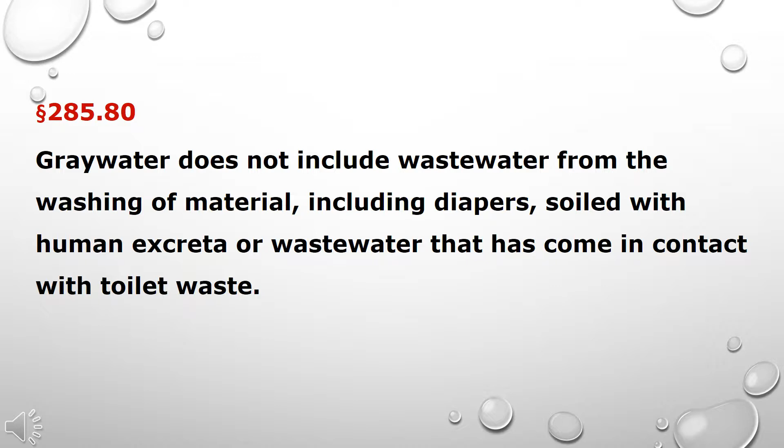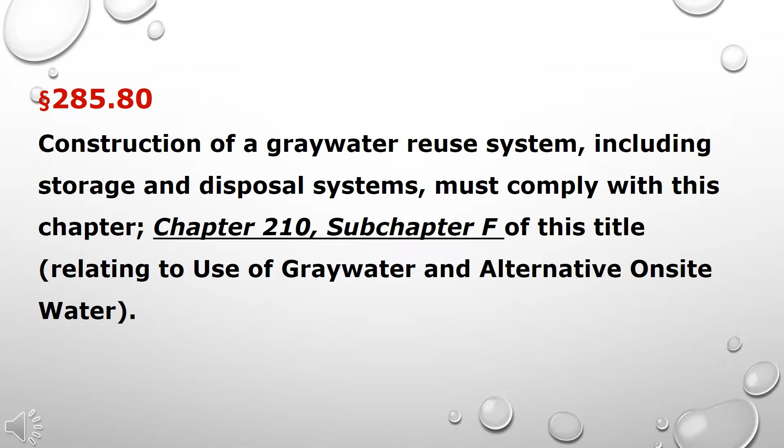So unless you've got a pier and beam house or something like that, you can get under and change the plumbing, you're really looking at new construction. So we're going to be looking at new things you're bringing to folks as we go along. Okay. Construction of a graywater reuse system, including the storage and disposal systems, must comply with this chapter, which is chapter 210, subchapter F. That's the big boy rules relating to gray water and alternative on-site water. And we'll talk about gray water and on-site water.

Gray water reuse must not create a nuisance. It must not damage the quality of the surface water or groundwater, meaning you can't go into ponds, the river, the lake, that type of thing when you're talking about surface waters. And you can't have it seeping into the ground. Let's say you've got your wellhead here, the pipe coming up, and all this water is gathering around and seeping down the casing and heading towards your groundwater. You can't do that. We're not going to be flowing it down the hole where we might have our casing.

So if gray water reuse creates a nuisance, threatens human health, or damages the quality of surface or groundwater, the permitting authority may take action under 285.71, and that relates to the authorization. That's where they throw the sheriff out there and shut you down. So they can basically say, we can stop you once you put it in. Well, that goes with anything we have; we make you fix a broken system as well. But in this case, there is authority to come back.

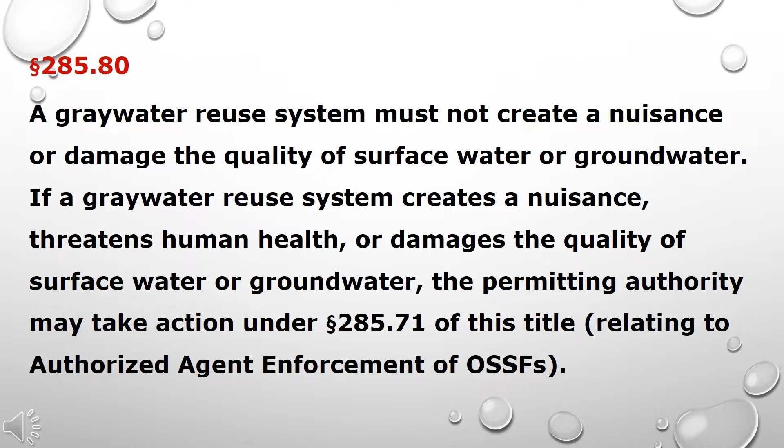Alternative water: we can combine our gray water, which is from our home, with the following: rainwater, air conditioner condensate, foundation drain water, storm water, swimming pool backwash and drain water, and reverse osmosis reject water. Those are all sources of other water that we're generally throwing out or putting into a system, and we can bring those in as part of our combined reuse system.

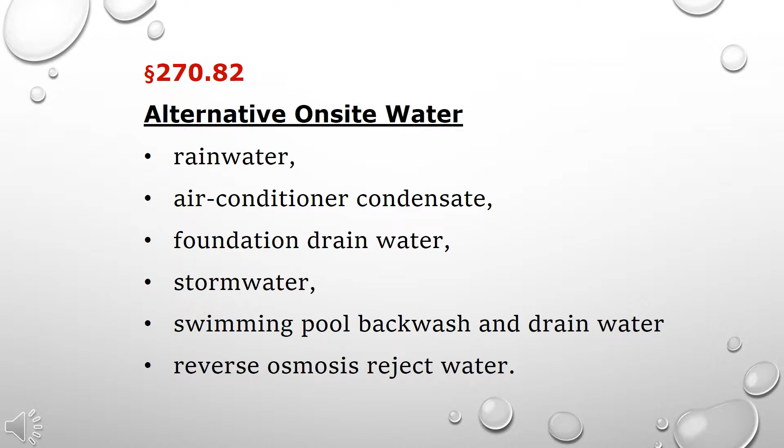All right. Under 285.80, no reduction in the size of the on-site facility, the OSSF, will be allowed when using gray water reuse systems unless the OSSF meets all the conditions and requirements of 285.81. Isn't that neat? We just turn the page and all of a sudden we can do it. But there's some things. I put this little warning up here: when you start going down that road of making things smaller because you think you're going to save somebody some money, unless there's a really good reason, I would approach with caution.

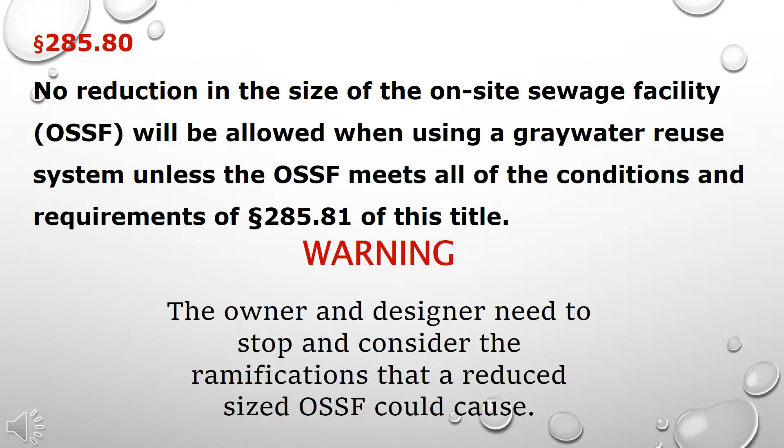The owner and the designer need to stop and consider the ramifications a reduced size OSSF could cause. In other words, are we going to have problems with this thing? You should be thinking: if I'm pulling the water that is our dilution factor, our showers, our wash water from washing machines, what's going to happen to the sewage strength? It's going to go up. We're going to talk about that, so keep that in mind. That's why I'm saying approach with caution.

Now this is a little comment I've got in here, so don't pay any attention to it. But it would appear that these two chapters, 285H and 210, were created to meet the apparent problems of some voting constituents. We have politics involved with this, and there's been problems with water. There's no doubt the severe droughts of the past years have left more questions than answers, and it was time for a political, not necessarily a scientific, solution. That's my own personal feeling, not TOWA or anybody else. But you've got to take a look at these things.

We've had problems, and we got some relief. Somebody said, hey, we've got all this water we're throwing away, how can we use it over here? Sure, go right ahead—other states are doing it. Why can't Texas do it? And we're not, but now they're doing it, basically pretty much hands off, letting you do what you want to do. Now, that does come with some concerns. So let's take a look at it.

So we've got waters from different mothers: gray water and alternative on-site water. That's the two different waters, coming from two different directions—two kinds of water that in the past would never have met. We would not be mixing water that typically came into our septic system with water that came off our roof or off a condensate system, unless it was plumbed wrong. We would never typically put them together. So now we can do that—we can pull them together. We're going to put them in a special place, but we can pull them together. The two kinds of water can now be mixed.

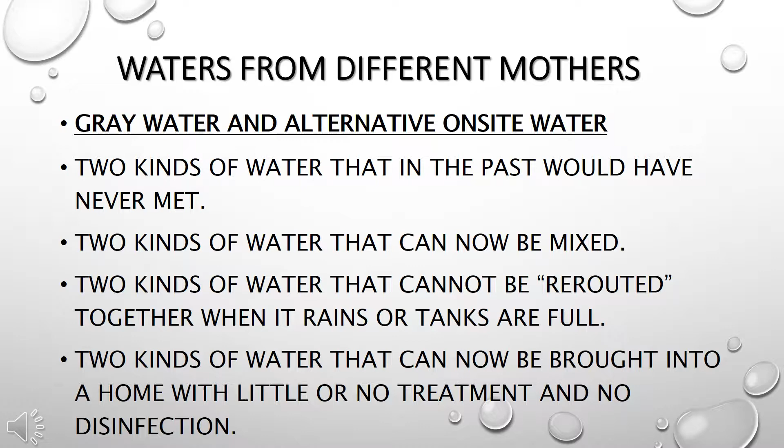Two sizes and two ways. Under the 285-80 and the 270 and the 210—I keep saying 270, but it's wrong, it's still the 210—graywater, and graywater as part of a combined system, can be connected to and returned to the OSSF if not being used. Now, the part that's going back, this is for a full-size system. So if we've got a big ATU out there sized up for our 3-bedroom home, and we took some of that water away, we can now bring that water back to it.

We can't bring the rainwater or drainage water back, but we can bring back the gray water because we're not using it. Maybe it's raining and the tanks are full, we have a certain level we can only keep our tanks at. So this is for the OSSF systems that have not been reduced from the reduction process with respect to the gray water removed. Any of that water that's not part of the gray water has to be redirected, piping that throws it back on the yard or down the gutter and away.

That's the first size. Then under the 285-81 and 210-81, Graywater and Graywater as part of a combined reuse system, which is where we bring them together, cannot be returned to the OSSF, nor even have connections to the OSSF if the OSSF has been reduced in size. So it has no home for it now, you can't put it in there.

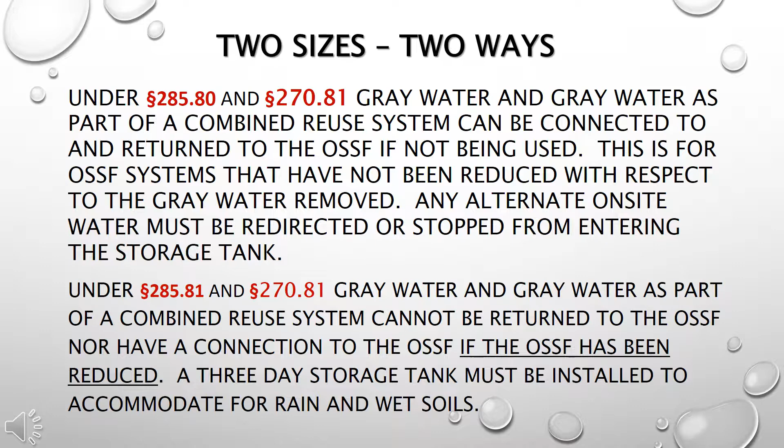Right now, the call is for a 3-day storage tank to be installed to accommodate that water for wet times. Any questions so far? This one is dated December 29th, 2016. 3-day capacity? That's a good question. Yeah, but it's 3 days capacity. Well, I don't know how much water that is. There's not a chart in there yet for that.

So under the 285-81, this allows for the reduction of the size of the OSSF that would have been installed under the old rule under 285-33. And 285-33, what is that one? Anybody know? Where are my designers? That's where we look at our normal sizing for these systems, our standard sizing for a regular ATU, septic tank, and all those kind of things. But in order to downsize the system, you must meet the requirements of 285-81 and 210 Chapter F, Subchapter F. That means there's a few rules in there you got to take a look at. So you get to tune the two books, take a look at this one, take a look at that one, and come up with something that meets both standards.

The OSSF with Graywater and combined reuse requires a special permit. This is for the downsized one, to take advantage of the reduced system. And this is for single family only, by the way. This is not for a small business, not for a condominium with several families in it. This is for a single family residence only.

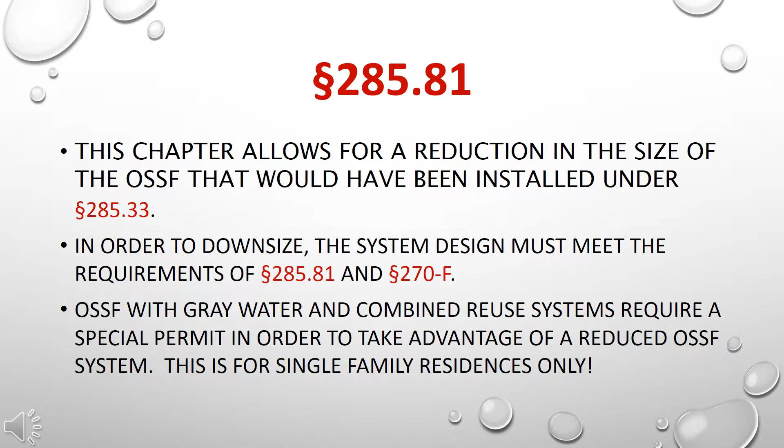So what can those numbers be? We kind of break it down into bites here. If you just want to take the clothes washing machine and send it out to the Graywater system and get credit for that, downsize your system a little bit, we'll give you 20%. If we have showers, bathtubs, hand washing facility sinks that are not used for disposal of hazardous things, you can get 30%. Then if you want the whole banana, the whole Monty, clothes washing machine, showers, bathtubs, all the way down to the sinks for non-hazardous materials - I'm not sure what that is, but I'm guessing that's your shop sink or something like that - you're going to get 50%. That's taking half of that water. So Ray, maybe we can figure it out that way.

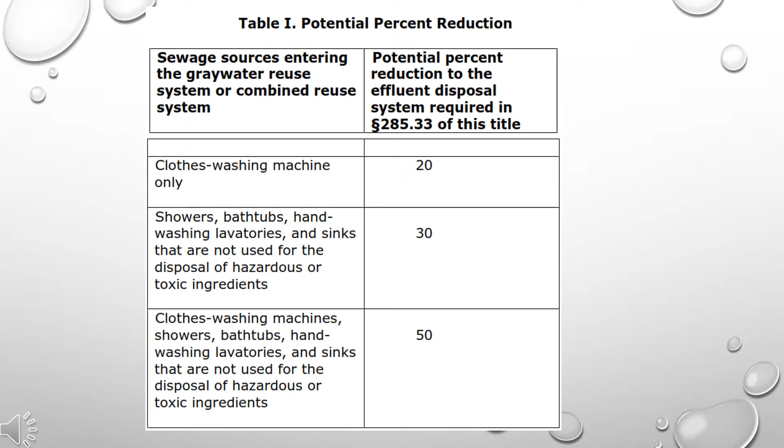So that amount of water compared and mixed in with what else you're going to catch is going to be your 3-day holding. The answer is that's kind of an open question right now. Got to get a plumber.

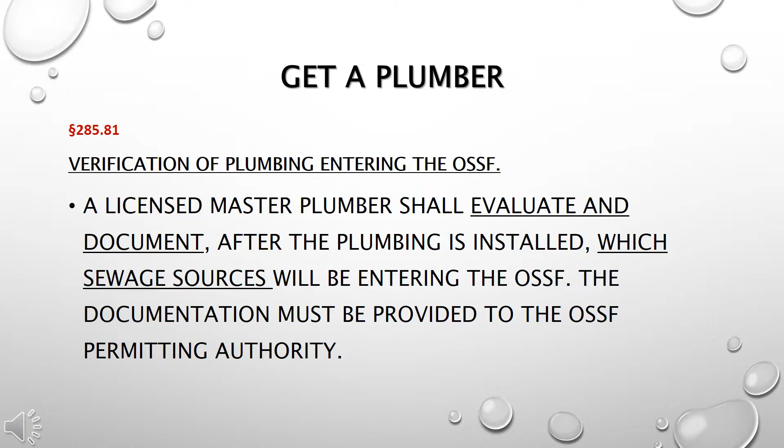Verification of plumbing entering the OSSF, and this is on our reduced system. Remember, keep an eye on what number we're on here. A licensed plumber shall evaluate and document after the plumbing is installed which sewage sources will be entering the OSSF. So if you chose door number 1, 2, or 3 - number 3 has everything - and that's what you said you're going to do under your permit, you're going to hire a plumber to come out here and verify that's exactly what you did. Because he's the guy - remember, we started at the edge of the house - he's the guy that starts under the house and in the house and around that. So he's going to have to bring it out and verify: yep, that's what I did, and that's what it's hooked up to. You may have all 3 different connections already made, but did you hook them up? So he's going to be the one to come out there and tell us, write it down, stamp it, sign it, and turn it into the regulatory agency, whoever you're dealing with - the county, whatever it might be.

Oh my God, what have I done? Okay, I've got into this thing now. Now what am I going to do?

So under the 285.81 means the reduced systems, capturing and reusing gray water and the alternative water may have sounded like a good idea. It may make you feel green all over, but what did it do to your OSSF?

If you walk out there and meet all those guys at the trade show, I think everybody in the world is represented out there. Ask them for their reduced system, the one they sell called the reduced system, that's been NSF Standard 40 tested. Ask them if they got one. I don't think you'll find one.

Can you even make a dent in reducing the BOD5 in the remaining wastewater after you've taken 20, 30, or 50% of that out, and now you're left with a standard system?

Who do you call and address this? Is this addressed in the owner's manual, whether from any of the manufacturers out there or something somebody else put together? I don't think you're going to find that. I think the answer is likely not, it's not going to be there.

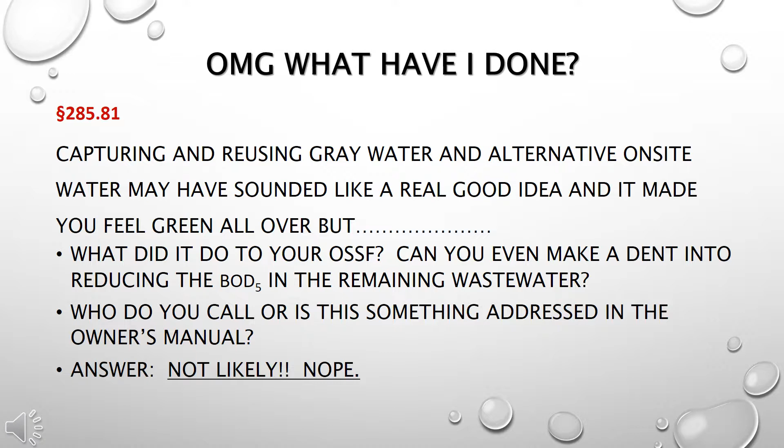They're not going to be in there saying, oh yeah, if you take all these waters out, we were fine, just run it for another 24 hours. But you only have 24 hours. It was tested over 24 hours.

So let's take a look at that. I think part of that's under the curtain, but the adjusted organic strength. This is basically what they're thinking is going to happen to this system when we have this.

So if we drop the clothes washing machine, we're thinking the water is going to go up to a strength of about 375. That's going to be the incoming effluent strength, incoming wastewater strength. Showers, bathtubs, and all the hand washing sinks without the clothes washing machine, about 430.

Where do we typically start? 140 mil, that's going outside into the wastewater, into your system. We're usually 250, 300 or so in there, right? Now we already jumped up once we jumped up at this point here.

So now we're at 430, and if we take all the things that we possibly can, now we're somewhere into the 600.

Well, somewhere around 250, 300, that's typical domestic strength wastewater. We start getting above that, we're starting to get into high strength wastewater. Get into high strength wastewater, we're talking about having to do something special to treat it, right?

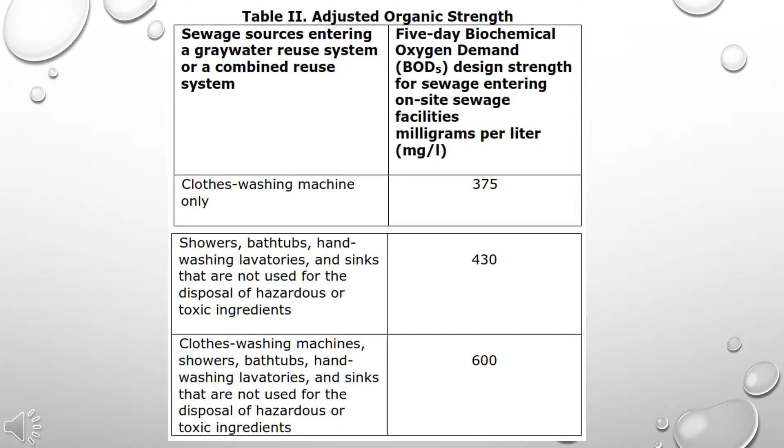All right. Okay. Let's see that from here. Okay. Can somebody please save me?

All right. According to the rule, under 285.81, this is for non-secondary treatment, so this is septic tank. If you're going to go out there and rob the septic tank, if you can come up with an RS that has probably a master's or a PhD in biology, or an engineer likewise, who can demonstrate with the effective treatment design and supporting calculations that the proposed treatment system will reduce the effluent to a quality of 140 milligrams.

The 140 milligrams is what? It's non-secondary. That's where we're supposed to start with a septic. That's what you were saying a while ago. And underground disposal. That's right, and underground disposal. So if they can come up with a way to show that it's good in your reduction system, you can go get your permit and go on. I don't know those people, I don't know those names right now who have the qualifications to make that decision. I'm not sure they're out there yet. But the door is open for that to happen. And that's the important part to know about this. The door is open for us to do that.

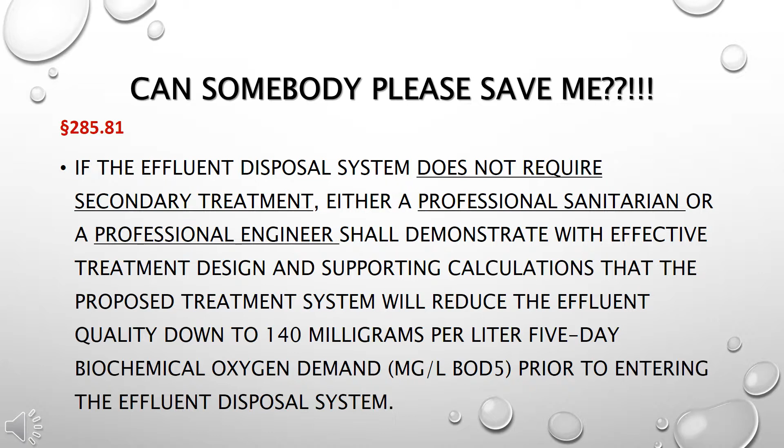Okay. So how about me? How about me meaning if I have a system that must remain at a secondary treatment level, then only a professional engineer who supposedly can figure this thing out, who has credentials in biological sciences and chemical engineering and things of that nature, shall demonstrate with the effective treatment design and supporting calculations that the effluent quality meets these levels under 285.32(e) of this title regarding the criteria for sewage treatment systems. And I put in there, what about the NSF 40 standard?

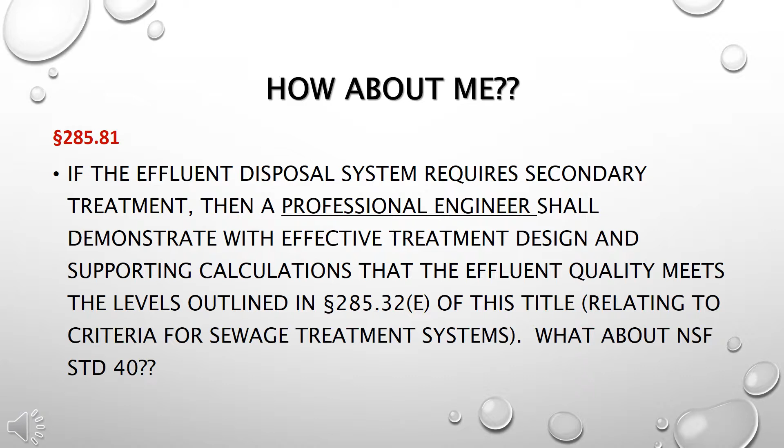These systems went through all kinds of testing. They spent all kinds of money to get tested and be certified to treat standard wastewater. Now we're going to come in here and say that an engineer with a smart calculator might be able to override all that and say, no, it's good. It's good. So just in case you don't remember what that little part of the

Again, approach with caution. It's there for us to do. It's there for us to offer our customers, but we have to do it walking in with both eyes open. No blinders on. You don't want to sell something like this that's going to create a health hazard for your customer. Don't do that to them. And that's not what you're trying to do.

You're trying to help them out, thinking that you're in a water-pinched area, and you have the plumbing to support that. Well, then what can you possibly do? So these are the things we're doing. The graywater side of it is not the hard part. It's what are you doing with what got left over.

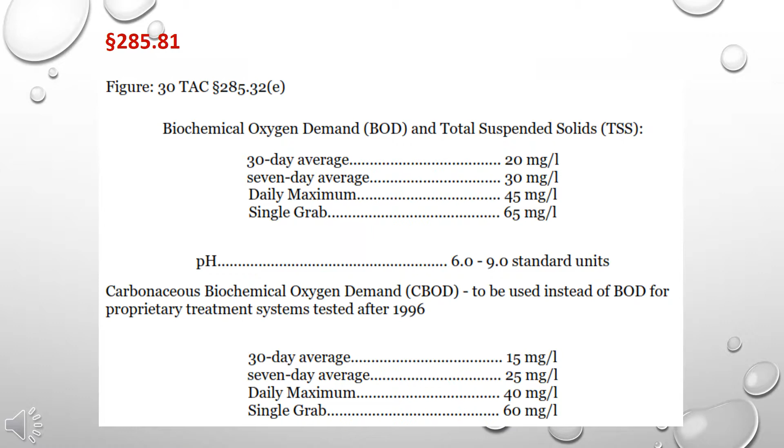Okay. So anything else? Okay. Under 285.81. So what are we gonna do?

So first thing we're gonna do is tell the world we're gonna do this, and let our neighbors and everybody else know that hey, we're gonna go get one of these new fandangled graywater systems, and we're gonna put it in our yard. So you've got to get a signed affidavit. That's not a little different than in a secondary system. You have to do that anyway when you put your ATUs in.

Okay, but you'll need details in there about the contingency plan too. So when this thing gets turned off, abandoned, or anything like that, what are you going to do? If you use the reduced OSSF, the disposal area, you'll need a reserve area. Now, sometimes we talked about reserve areas in the past on other systems, but you're going to have to basically set aside that land, good land, with all the setbacks, not a piece of junk. It's not under the swimming pool, it can't be under the driveway, it can't be under the house, that you're going to be able to go to and finish the system if you've abandoned this other thing.

So if you've got the reduced system and you don't have the full-sized area, then you're going to have to come in here and take this thing down and finish it out. And so in the beginning, in your permitting and everything else, you're going to have to draw in: this is my reserve area, stay out of it, make sure it stays pristine and ready to go.

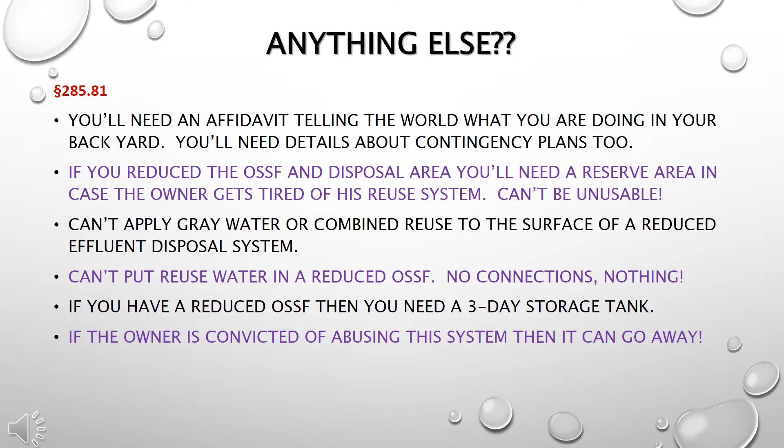Okay. So enjoy your reuse system. Understand what having a graywater and combined reuse system really means for the owner. You've got to think about that. Make sure you understand that and make sure you've sat down with that owner. Think twice before reducing the OSSF because your backup system is missing.

Now, let me ask you this. Whether it be a reduced system or not, you still have that problem of a higher strength wastewater, okay? So you might find out when you talk to a manufacturer here that the OSSF, from their point of view, is going to be this big because we've got to get that much air into it.

We've got to get this BOD knocked down. I don't know, okay? But they can talk to you about that. This is kind of outside of the normal things we do every day with standard wastewater. So what I've got also in here says it's not likely that you may save any money in the end if that was your intention for the reduction, because we're already going to have to add a 3-day tank, and then we're also going to have all this special piping.

We're bypassing the system when this is not working or that's not working, okay? Or just sending it off some other place. So think about that. Make sure you've run the numbers on that. Now, I've got a little recommendation here. This again is from me. It doesn't have to do anything with rules or what's in the books.

I would suggest that if you don't have this, for one thing, this water that's graywater has been reduced and everything else. It's got to be handled in the yards correctly or handled in the piping coming back to the house correctly, okay? There are people who know how to do that. They do this kind of on a regular basis. One of them might be a licensed Texas irrigator. The other one is the folks over at ARCSA, okay? That's the American Rainwater Catchment Systems Association. They do this all the time.

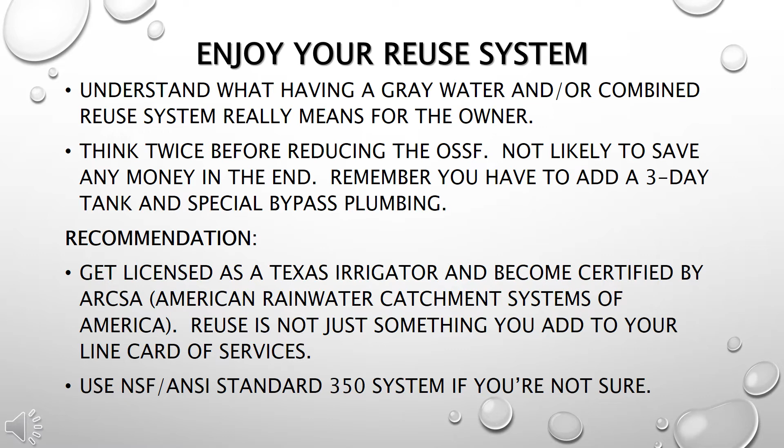Okay, so the primary recommendation here is to say, let's look at the NSF ANSI standard 350 system if you're not sure how to approach this thing. If reuse has got to be part of your life and how you go at it, I think they've spent a little bit more time looking at that. Like I said a while ago, we don't have time to spend that much time on it. We're going to just give it a little bit of mic time here, but go by booth 422 and have a look at what they've got.

Now, here is the only couple of pictures I do have in this thing. This is a system that comes from across the big pond out there, basically from Germany, and this is one of these systems that has gone through the NSF 350 standard. That was presented, and I just found it interesting the amount of what's going on with this thing.

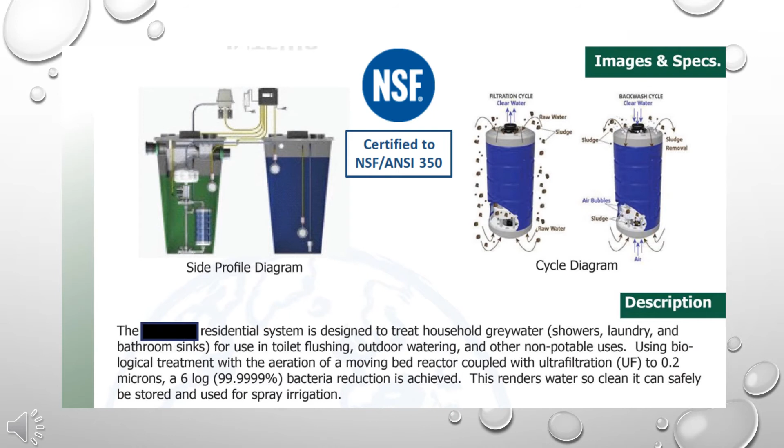And quickly, I'll just show you here. This is a treatment pack system here, and this is storage. So you have a tank in your storage unit. Internally they're using what they call a moving bed reactor. They're putting air in there. They're breaking down BOD. They're using biologics and stuff like that. Kind of sounds like a secondary treatment system to me. And I just found it interesting.

I'm just showing you there are things out there on the market, and these are high-end systems. But do know that Texas is not the only state we're looking at, and other states are doing the same thing with the reuse, or with the Graywater. And they're not having to do a whole lot to it to make it usable, okay?